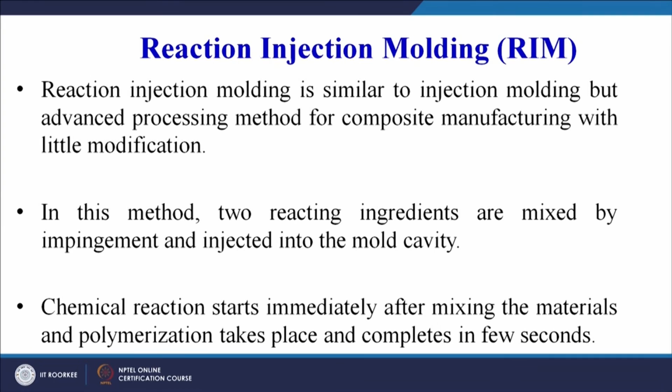Now let us see how this hint is going to help us, and maybe we will see today that this reaction injection molding may be more suitable for thermosetting type of resins. Let us go through and try to understand. Now the chemical reaction starts immediately after mixing the materials, and polymerization takes place and completes in a few seconds. So we have different ingredients coming from different chambers and getting mixed in a third chamber where the polymerization takes place, and finally this mixture is pumped to the mold cavity.

Major portion of reaction injection molding process acts as a high pressure pump. So I have already told that we have to pump this material into the mold cavity. This process is suitable only for thermosetting resin where a curing reaction takes place within the mold cavity. So the hint which was dropped in the previous slide has been confirmed here, that this process is most suitable for thermosetting type of resins.

So the previous setup we have seen in our session number 20, as well as in a previous session when we were discussing the processing of polymers, is mostly suitable for thermoplastic type of composites. So whenever thermosetting type of polymers will be used, we will make use of the reaction injection molding process, where a curing reaction takes place within the mold cavity.

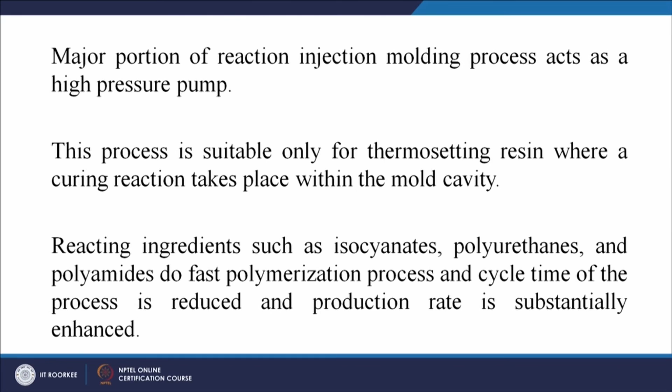Reacting ingredients such as isocyanates, polyurethanes and polyamides do fast polymerization process, and cycle time of the process is reduced and production rate is substantially enhanced. If you remember, in hand layup process we have seen that it is used in most of the cases for thermosetting type of polymers only, and the cycle time is quite large. Sometimes it may range for a 24-hour cycle time also.

But here you can see the type of raw material that we are using, or the reaction ingredients such as isocyanates, polyurethanes. The cycle time has been reduced. So that is one advantage of reaction injection molding. Now reaction injection molding has further two variants, that is reinforced reaction injection molding, RRIM, in which the fillers including chopped glass, carbon, graphite fibers can be incorporated into one or both monomers. So we can pre-blend the fibers into the polymers or the monomers.

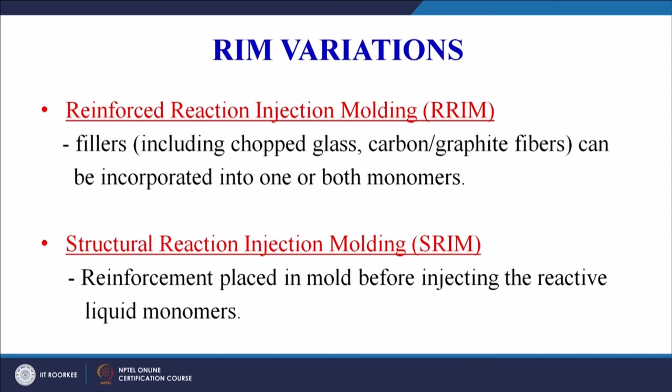Or the second variant is structural reaction injection molding, that is SRIM. The reinforcement is placed in the mold before injecting the reactive liquid monomers into the mold cavity, and once the fiber is already there in the mold, you introduce your monomers, and finally the reaction will take place and the final composite product will solidify in the mold. The mold can be opened and the product can be taken out. So there are two variants, reinforced reaction injection molding and structural reaction injection molding.

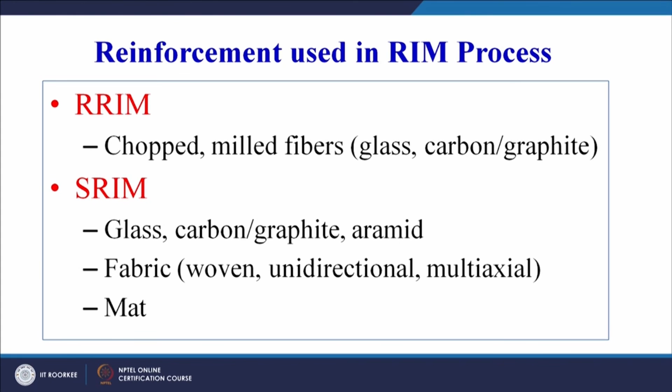Now let us try to understand these processes. The RRIM process, as I have already told, is used for chopped or milled fibers. Glass, carbon, graphite fibers can be used as the reinforcing agent for the thermosetting polymers. In structural reaction injection molding, glass, carbon, aramid fibers can be used. These fibers can be in fabric form, woven or unidirectional multi-axial fibers, or in the mat form. The mat and fabric, we can just remember that they can be in the form of cloth.

So in the mat form, you have fibers in both the directions, in the warp direction and in the weft direction. From a textile terminology point of view, warp and weft is more appropriate, and from mechanical engineering point of view, fibers are running in the longitudinal direction as well as in the transverse direction. So the fibers can be pre-placed into the mold cavity. The reaction components react and are pushed into the mold cavity where the fiber is already there, and finally they will impregnate the fiber and we will get our composite product on the curing of the polymers.

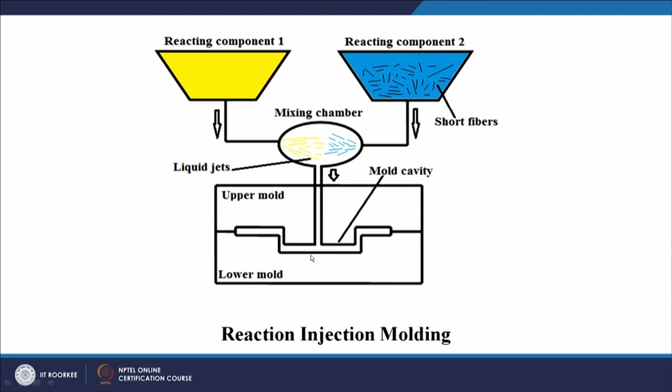So we have a yellow reacting component, it can be one type of monomer, and another type of monomer which already has pre-blended fibers. Both of them are mixed in the mixing chamber and then pumped into the mold cavity, and once it has solidified, we can open the mold and take out the final product. So this is the basic concept of the reaction injection molding process.

Let us see what happens in structural reaction injection molding. It is a variant of reaction injection molding. Instead of using chopped short fibers and fillers, as in our diagram where the blue reacting component had short fibers, continuous woven fiber mat or chopped strand mat can be used. So we can have a mat form of reinforcement in which the fibers run both in the lateral and longitudinal direction.

So these fabrics are already placed into the mold cavity, as we have seen in our previous slide. We put our reinforcement in the mold cavity, then mix the reaction components and push them into the mold cavity where the final curing of the polymer takes place, and we get a solid rigid composite product after opening the mold cavity. So these fabrics are already placed into the mold cavity, similar to the resin transfer molding process.

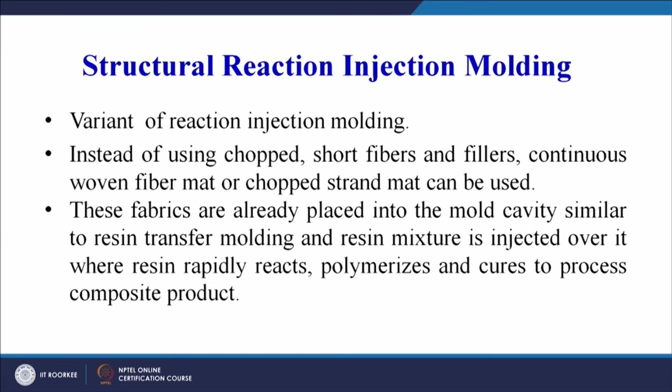Now one more process we are seeing here, that is RTM, the most commonly used process for making composite products, resin transfer molding. Transfer molding we have already covered for polymers. A similar mechanism is there for resin transfer molding in context of composite materials. So if you remember transfer molding for polymers, the process details for resin transfer molding will be very easily clear to you.

Similarly, the structural reaction injection molding process is also similar to resin transfer molding, because in that process also our reinforcement will be pre-placed inside the mold and our polymer will be transferred to the mold cavity at high pressure, and there it will react and form an interface between the fiber and the polymer, and we will get our composite product on solidification.

So in structural reaction injection molding also, the fibers in woven mat form will be placed in the mold cavity, and the reaction components will mix in a chamber and be pumped into the mold cavity, where the fiber already is. The resin enters the mold cavity and they combine to make a composite product. The resin mixture is injected over it, where the resin rapidly reacts, polymerizes and cures to produce the composite product.

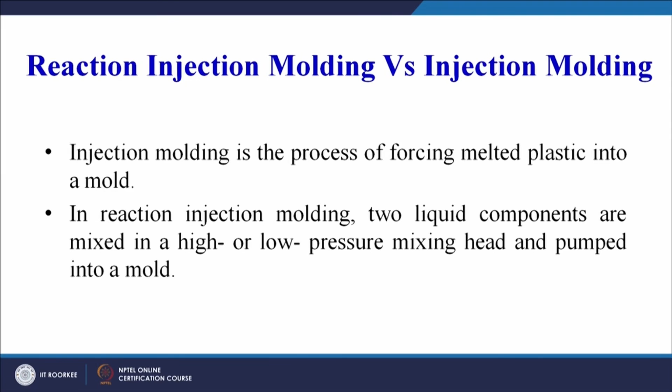In reaction injection molding, two liquid components are mixed in a high or low pressure mixing head and pumped into the mold. Now if you remember the diagram of the injection molding process, the polymer pellets come from the hopper.

They enter into the barrel, which is heated because of the heating arrangement all around its periphery, and then the screw inside the barrel feeds this polymer pellet forward towards the mold cavity, and because of this length and the shearing action by the screw, this polymer melts or softens, and this soft polymer then moves forward with the rotation of the screw and is fed through the nozzle into the mold cavity. So that is the basic concept of injection molding.

Whereas in reaction injection molding, as we have seen today, there will be two reacting components. They are getting mixed in a mixing chamber, and from there they are being pumped into the mold cavity. So here there is reaction taking place between the two components, whereas in case of injection molding there is no reaction taking place. The direct polymer that is coming from the hopper is being fed into the mold cavity through the barrel, which has got a heating arrangement. So there is no chance of any reaction between the different constituents.

Now let us try to understand the conventional thermoplastic molding versus the reaction injection molding. In thermoplastic molding, we have seen the thermoplastics are in the pellet form, whereas the thermosets are in the liquid form. As we have seen in the very beginning, there was a hint that this is because of the reaction between the ingredients, and the reaction usually takes place between the hardener and the polymer that is in the form of epoxy or polyester, which is a thermosetting resin. So the reaction injection molding process may be more suitable for the thermosetting type of polymers, and therefore it is clear in this differentiation also that in thermoplastic molding, thermoplastics are available in the pellet form, whereas in reaction injection molding the thermosets are used which are available in the liquid form.

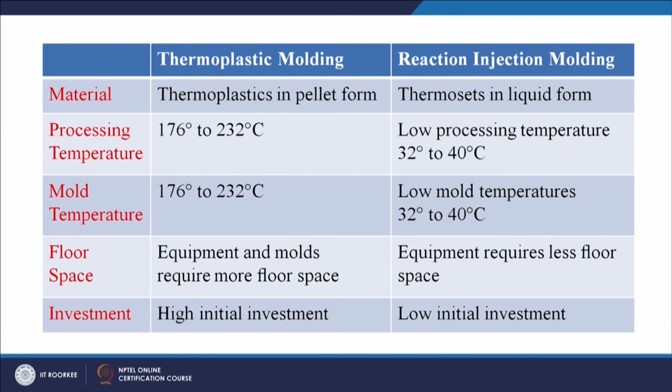Floor space: the equipment and molds require more floor space, whereas equipment requires less floor space in case of the reaction injection molding process. If you have seen any standard injection molding machine, it is a large size machine as compared to the size of the product that it can process. For a very small product, maybe of the size of this pointer, we may have a machine which will occupy maybe an 8 feet by 8 feet room. So the size requirement of the injection molding machine is larger as compared to the reaction injection molding machine.

So a high initial investment is required for thermoplastic molding. As I have already told you, we have to properly control the process when we are using thermoplastics as the raw material and injection molding as the process; we have to have precise control over the process. In the last session we listed down so many parameters: the injection pressure, the injection temperature, the clamping force, the holding time, and other parameters like the melt viscosity, the heating rate, the heating cycle. All these parameters need to be controlled, and when there are so many controls that we have to exercise, the process automatically becomes slightly expensive.

Whereas in the reaction injection molding process, the process is not that expensive. Why? Because we are not going to control too many parameters. So therefore the process remains within the capital investment limits.

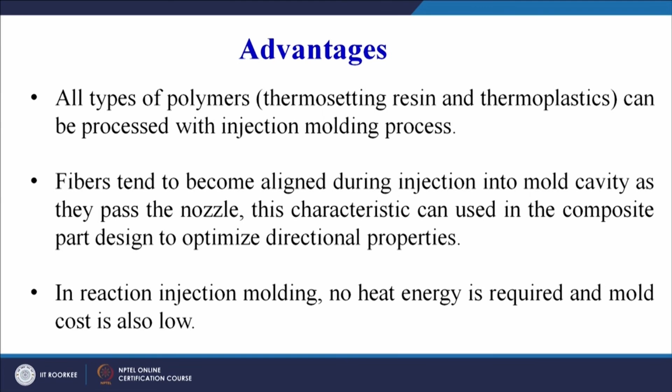Now our melt mixture, which also has fibers, when it moves through the nozzle and enters the mold cavity, the fibers have a tendency to get aligned in one particular direction. And if you understand the composite from the mechanics point of view, the direction of fibers in a composite also plays a very important role, and we get different properties in different directions. Along the direction of the fibers we will get different properties. Across the direction of the fibers we will get different properties.

So if we can control the orientation of the fibers in our composite, we can very easily control the properties of the developed composite also. And in injection molding we have this liberty, this advantage, that we can control the movement of the fibers inside, as we are using short fibers. With the optimal design of the nozzle, the diameter, the gate, the runner, we can try to ensure the direction of fibers in the final product, and that will help us to make products which have directional properties.

Some people usually call them smart materials, or maybe not. Smart materials may not be the right word. The right word can be functionally graded materials, having specific properties in specific directions. So that type of advantage lies with the injection molding of composite products.

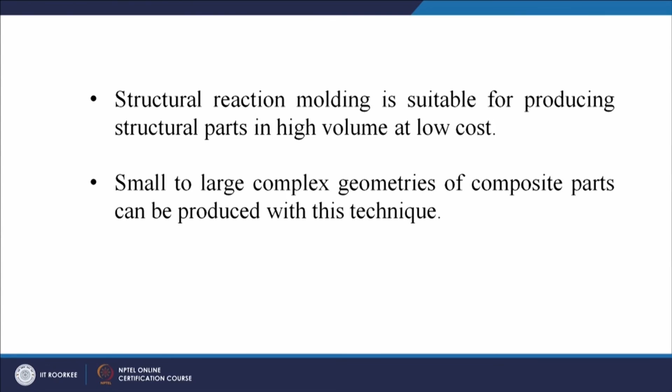Structural reaction injection molding is suitable for producing structural parts in high volume at low cost. So that is another advantage which is specific to structural reaction injection molding. Small to large complex geometries of composite parts can be produced with this technique. So complexity can also be achieved with the reaction injection molding process.

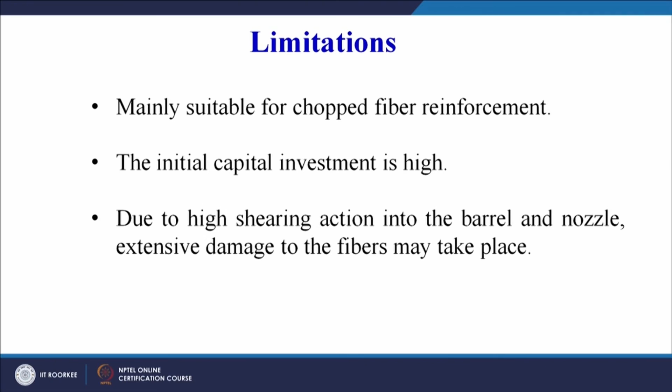What can be the limitations now? It is mainly suitable for chopped fiber reinforcement, whereas structural reaction injection molding can be used for woven mat type of fibrous reinforcement also. The initial capital investment may be higher compared to the hand layup or spray layup process, but will certainly be lower than the conventional injection molding process. Due to high shearing action in the barrel and nozzle, extensive damage to the fibers may take place, specifically in the case of the conventional injection molding process.

So there are a few more disadvantages. Quickly we will go through them. Due to the high tooling cost and operation cost, it is not preferred for small production runs, which was highlighted in the very first slide we have seen: the injection molding process should be used for large volume mass production when a large number of parts have to be made. The process is not suitable for a small number of parts.

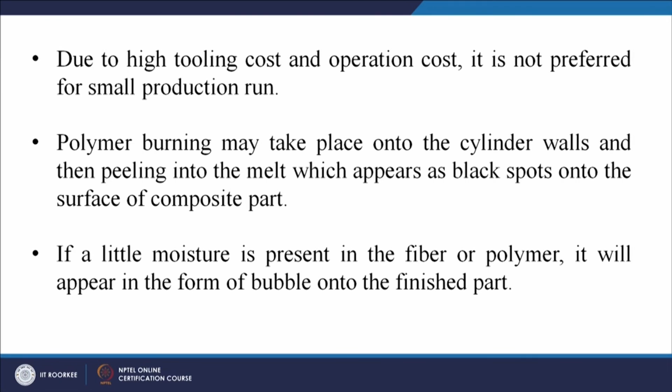Polymer burning may take place on the cylinder walls and then peel into the melt, which appears as black spots on the surface of the composite parts. Excessive heating may lead to this type of defect, that is black spots on the composite part because of the burning of the polymer, which needs to be avoided.

And if a little moisture is present in the fiber or polymer, it will appear in the form of bubbles in the finished part. So usually it is advisable, when you are going to go for injection molding, that the constituents or raw materials be put in an oven for a specific duration of time at an elevated temperature to remove all the moisture. Otherwise this moisture may appear in the form of bubbles on the final composite product. So that has to be avoided. There are methods to avoid these kinds of defects.

So with this we come to the end of our discussion on the injection molding process. To summarize, we have covered the injection molding process for processing of polymers and for processing of composite products. We have also covered two variants of the injection molding process in the form of the reaction injection molding process as well as the structural reaction injection molding process. In the next session we will focus our attention on other techniques used for processing of polymer composites.